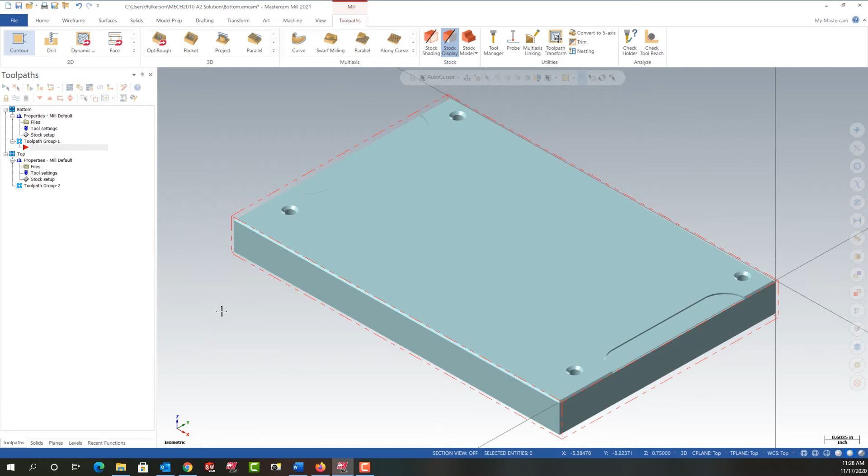In this video, I want to demonstrate how to add the contour toolpath to the bottom of your part. The first thing we see when we read the instructions is we're told to use solid chaining to start on this side of the part and as far away from the origin as we can, so over here.

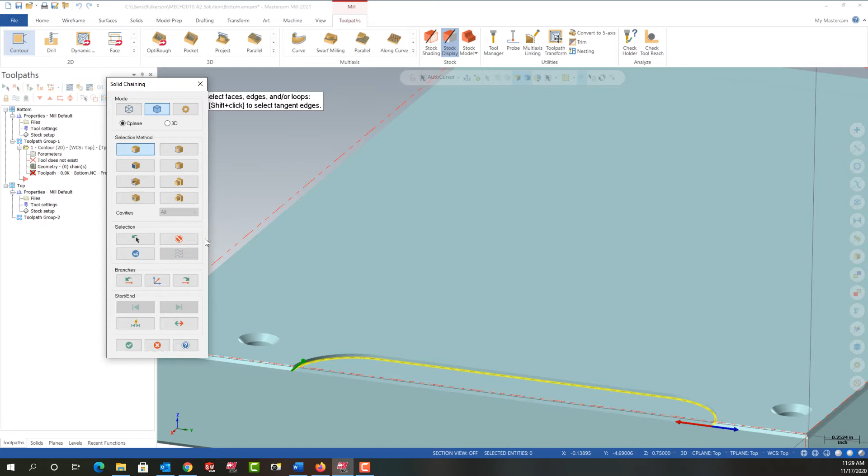First I'm going to select the contour toolpath, then make sure I'm in solid chaining, and I want to use the edges chaining method. I'm going to rotate this part around a bit and zoom in on this edge. So I want to select this edge, and it shows me it's going to start here and come around and end here.

I'm going to zoom out and rotate around. I want to select the same geometry so the cutter is on the same side of the part over here. First I'm going to tell it to end that chain, then continue rotating around, and I need to select that edge first. That chain's good, so I'm going to end that chain. Then I can end all chaining.

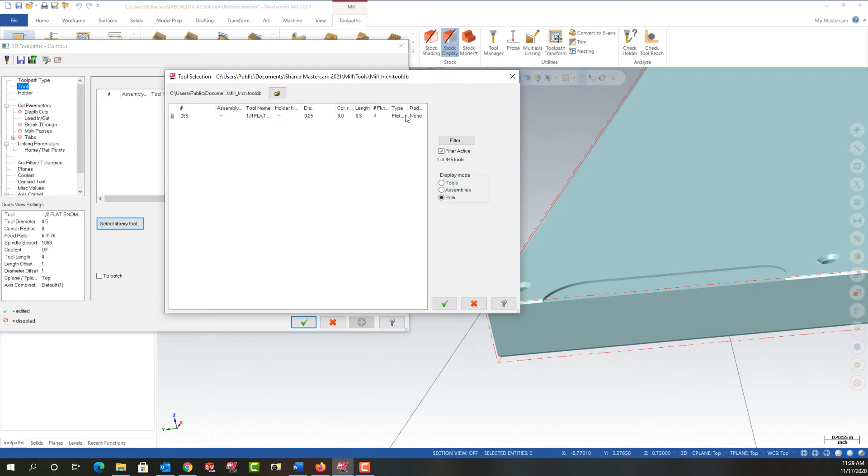I'm going to come here to the window, go to Tool, tell it to select the tool from the library, go to Filter, say None, then switch to Flat Bottom End Mills. The size of the tool isn't mentioned, but it has to be smaller than the radius on the part. So I'm going to right click here and tell it equals the diameter of an arc, and I'll just choose that arc. I see that's 1 inch, so the tool can be anything under 1 inch.

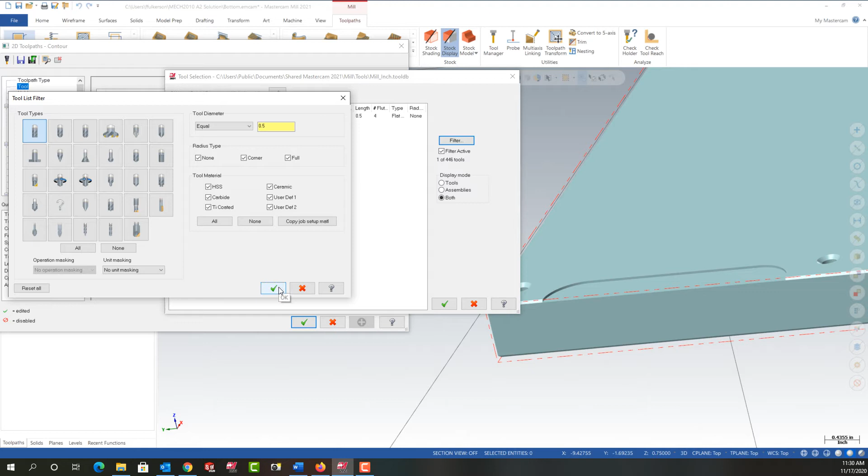I'm just going to set it to 1/2 inch. 3/4 will do, 5/8 will do. It didn't say what size, it just said make it work. So I'm going to say OK. I'm going to choose this 1/2 inch end mill and say OK again.

Down here it says the cutting speed is 400, so I'm going to enter 400 here. Always turn on rapid retract. It says the feed per tooth is 10 thou, so I'm going to enter 10 thou. I'm going to add a comment with the caps lock on, cutting the slots or whatever you'd like to call them.

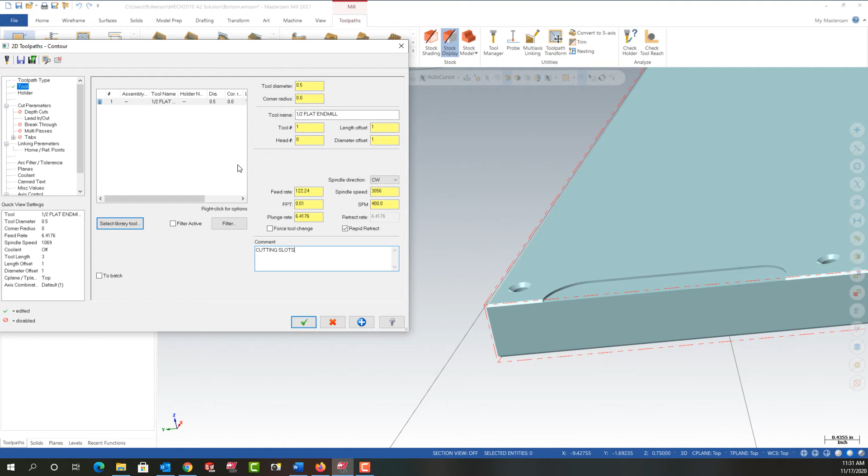Then I'm going to come to cut parameters, and again I'm going to read my instructions. I see I missed something, so I'm going to go back to the tool. It says make the plunge rate 50, so I'm going to enter 50 here. Now I can go to cut parameters and have a look if I need to set anything up.

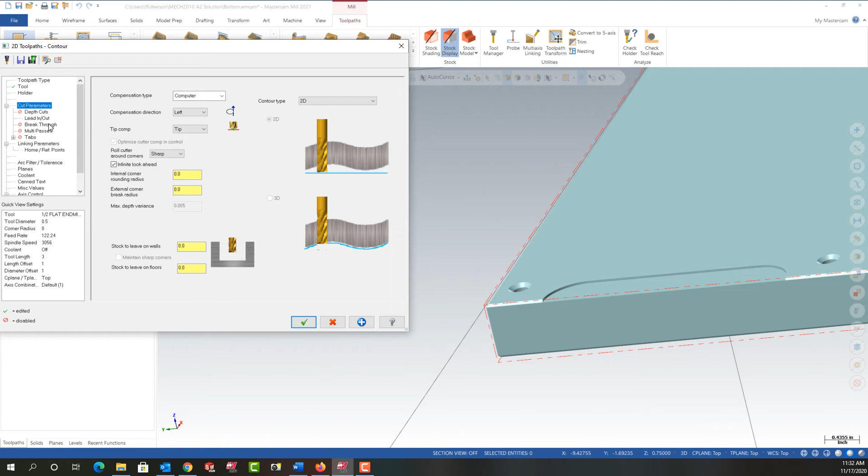This is only cutting a 30-second deep, so we don't need a rough and a finish pass. It doesn't say to use depth cuts. I'm going to leave the lead in and lead out to the default unless they don't work. I don't want a breakthrough, but I do want multi-passes because I was told the step over has to be 70% of the cutter, so I'm going to turn this on.

The number and spacing will be up to you, but I need to use 70%. So 0.5 times 0.7 gives me 0.35, so I'm going to tell it to take 2 cuts. Then it says it wants 1 finish pass, so I'm going to enter 1. And the spacing is 15 thou.

The only 2 other instructions I've given for these is that the flood coolant must be on, and the tool has to feed from 100 thou above the part 0. So I'll watch that these cuts work when I simulate it.

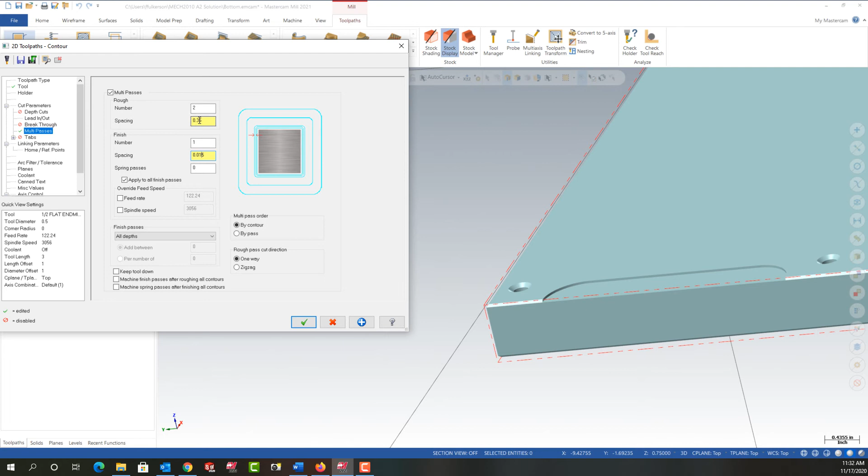I'm going to go to linking parameters. I'm going to make all of these absolute. So these are fine. There is a 30-second of material here, and it is going negative a 30-second. So the last thing I need to do is go to the flood coolant, turn it on, and say OK.

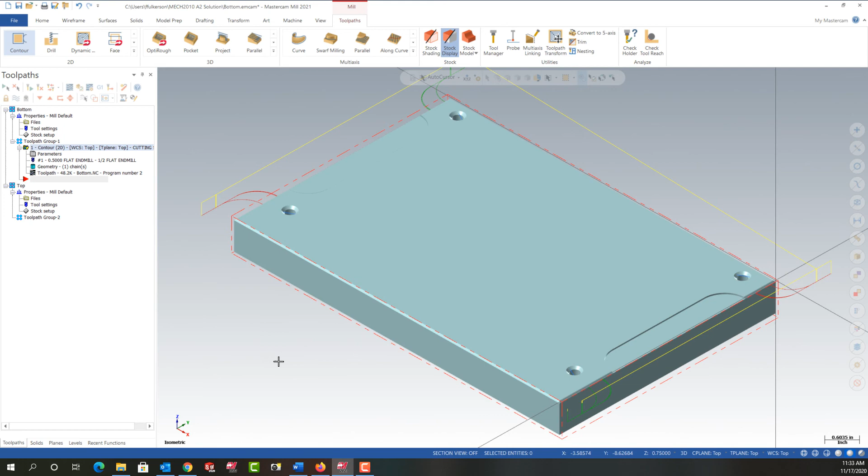I'm going to right click and show the isometric view. I want to double check that the cutter's on the right side of the material. So I'm going to push Alt-S to turn the shading on, and I can see right away I've got the cutter on the wrong side. So that's fine, I'm going to go back into the parameters.

I'm going to come up to the cut parameters. I'm going to switch this from left to right. Say OK, regenerate that, and now they're on the proper side. So I can go ahead and simulate this.

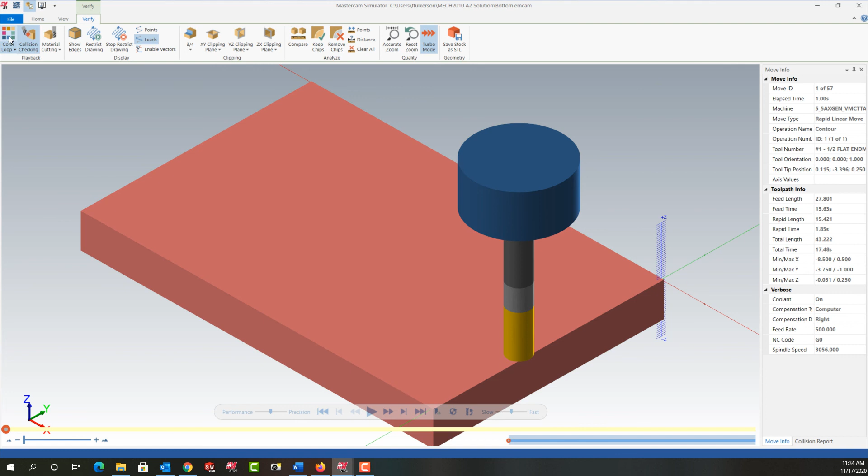So when I simulate, I'm first going to go to the verify, and I want the color loop to turn on so that each tool leaves its own color on the part. Then I'm going to go ahead and say run. And I'm always going to look at the collision report and make sure it's empty.

So it's cut my part, and it's what I had hoped to see. I have the step over. Here's the first cut, here's the second, and the finish pass, taking that 15 thou. So I'm going to save my work, and in the next video we'll continue with the next step of the instruction.